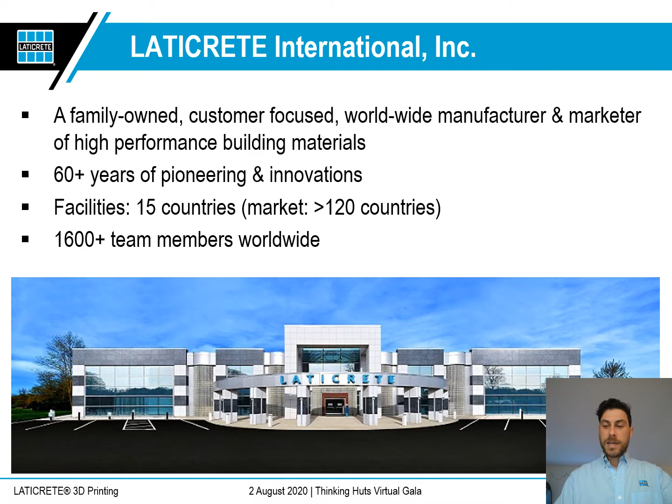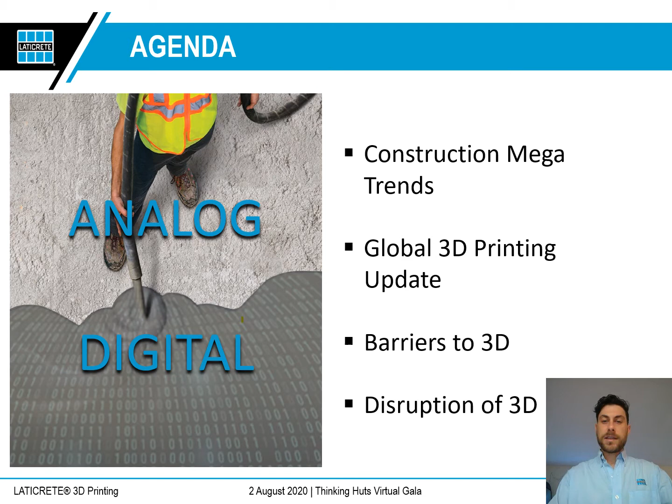So the agenda today: walk through some of these megatrends, what's happening also now with COVID-19, construction, global 3D printing, then some of the barriers that are slowing the adoption down, and the disruption potential that's out there.

COVID has changed a lot of people's working behaviors and perspective on things. One silver lining is that tech adoption is at an all-time high. Case in point, we're having this on Zoom. Most likely six months ago, this would have been an in-person meeting with me presenting in front of a crowd. So this is already quite a difference, but for a lot of people it's working well.

So we're seeing stuff like video analysis being brought right onto the job site. Do we have the right PPE? Do we have face masks and helmets? Are people following the safe social distancing protocols? There are sensors that alert people if they're not.

We're also seeing an increase in modular construction, bringing more off-site and bringing more finished product to the job site, seeing the efficiencies there. It's also a more controlled environment, with potentially fewer people on the job site. This changes the perspective of a building from a one-off project into more of a product, a manufactured product, rather than just a single construction project.

Also, there's even more advanced stuff. We're seeing autonomous vehicles—this is Built Robotics in the bottom left. They have autonomous excavation and other construction heavy equipment that's now being automated, so it's fully autonomous.

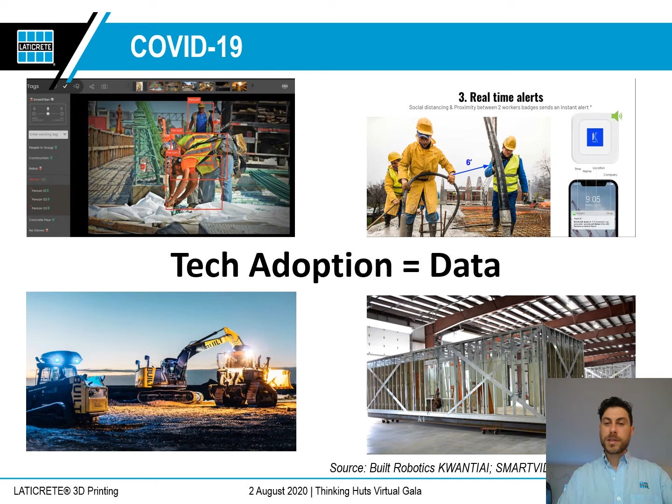With this perspective changing, we're asking ourselves: this finished product, what does it look like and how do people interact with it? So the idea of a healthier building, not just meeting building code or efficiency goals, but also how does this improve the productivity and life of the people using that building? Especially here we're talking about schools—there have been countless studies showing that better lighting, better air quality, and better ergonomics really influence the learning and adoption of what is being taught.

So this is perfectly applicable—we're seeing it through the lens of COVID-19 and how to make a building healthy, but it definitely applies to schools as well.

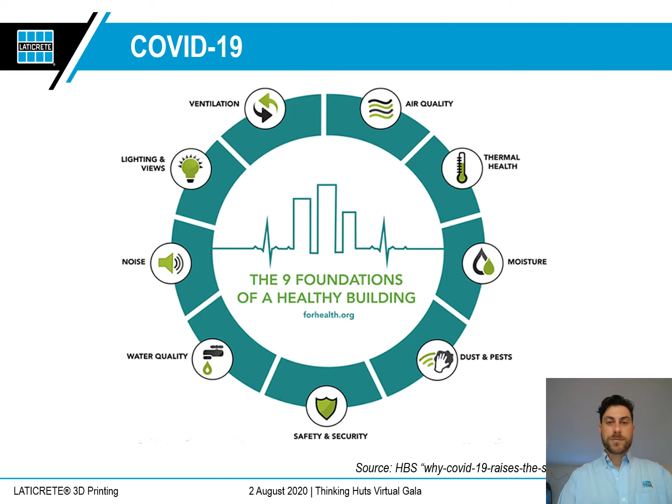Another thing worth noting: the world is definitely changing. We're seeing many more natural disasters, from wildfires to hurricanes, and population is continuously increasing. We'll definitely need more schools in the future, but with these natural disasters and instances happening, people are really questioning the efficacy of the materials we choose.

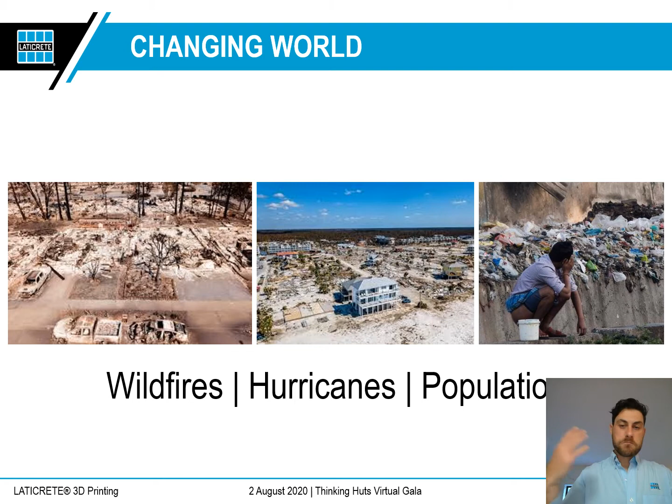So you look at the picture in the middle—the concrete house that was built independently, not the tract homes that got completely destroyed while meeting the minimum building code. The one in the middle, personally built, withstood the hurricane with no problem. People are starting to change their mentality as these events only increase in frequency.

Construction as a whole is seen as one of the least productive industries—it's basically flatlined in productivity over the last 20, 30 years, but it's a massive industry: 13% of GDP globally is represented by construction. With that low productivity, it's a huge arbitrage for venture capitalists, kind of the last frontier for them as far as an area to invest in.

So we're seeing just last year, 6 billion globally, thousands of startups popping up—again, that increase of tech adoption as well. This idea of the digital twin has only increased, with now 55% of companies saying they'll be utilizing it in the next 2 years. But take this as it is, because construction is a very complicated product, and the supply chain is not so simple.

It's not, and each project is still a one-off thing. With at least 80 trades, or on the average job site 80 trades doing different work, that's quite a feat to optimize the whole process and get everybody working together. So there's definitely still challenges.

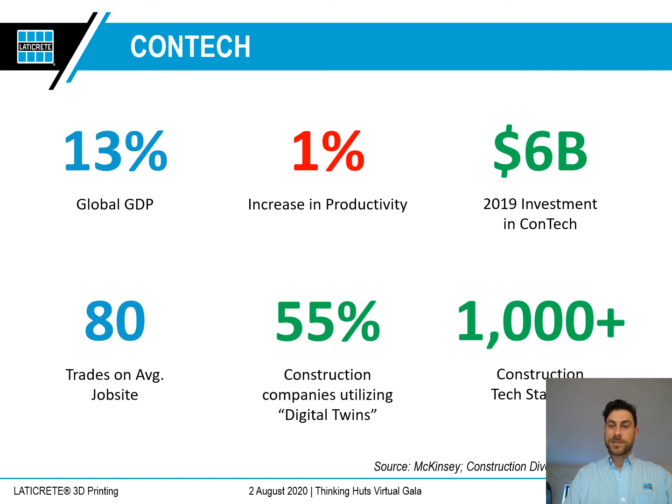So when we talk about this change in construction with technology, for me, and relevant to 3D construction printing, it's really this single term: constructability. This term is basically saying, well, how are we going to build the structure? It might sound rudimentary, but in the design phase there's often a break — someone's designing it, someone's saying, can this be structurally sound? Can we build it?

And then it's passed over to somebody else to actually figure out how to build it. With 3D printing, everything being a digitally native technology, you know exactly how the thing is going to be built. Whatever the G code is that's telling the printer where to place the material, that's what you're getting — so the as-built is equal to the design. We're able to ask this question in a very iterative and early stage in design of how we're going to build it, so the data is always being collected. As 3D printing develops, all of this coming together is producing a more efficient way to build.

Construction 3D printing is not going to take over everything. There's a time and a place, and again it's asking the right questions of when it's more viable. 3D printing is not going to replace tilt-up walls in the near future. Simple box type construction is definitely not an avenue for 3D printing, at least in the near future. In the near future we're looking much more at highly complex builds, added value that you can only get via 3D printing.

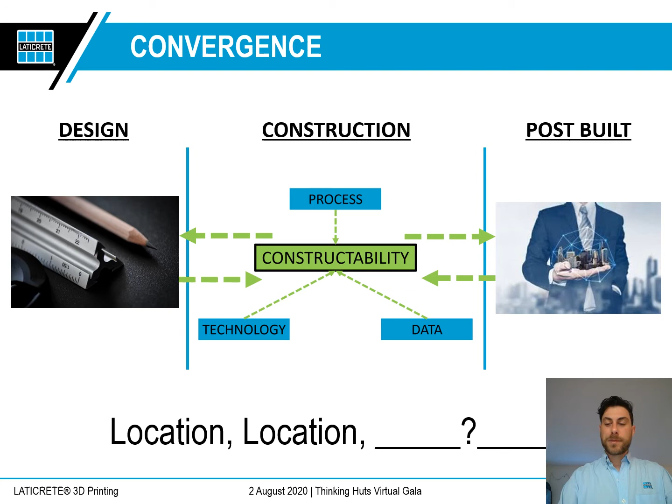In the past, location really dictated a lot of the development of the property, and now we're starting to see where these things can be somewhat separate. You can have the land itself, and that appreciates or depreciates independently from the actual product, the house that's being built on it. So a lot of new concepts are being brought into how we look at and evaluate construction.

So what is 3D printing? Essentially, you take that design, you slice it, you break it into layers — so the other term for it is additive manufacturing. You take the computer model and you create what's called a G code. The G code is essentially an XYZ point cloud in space; it says place this material here. Then you have a printer, the actual hardware behind it.

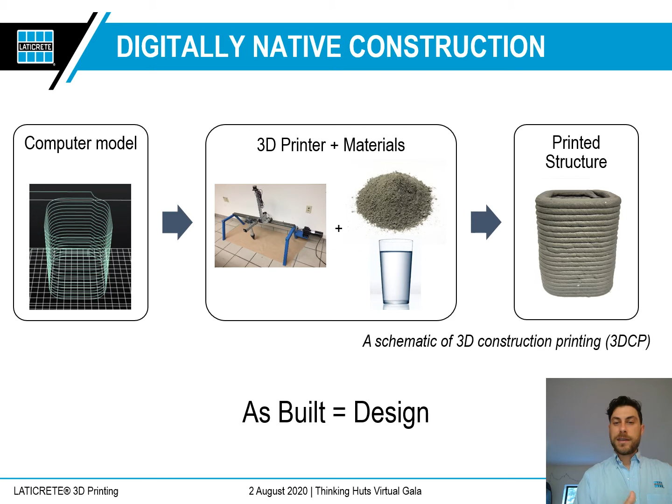In our case, this is a one-component system, so you just mix it with water — that's our LATICRETE 3D printing mortar. With a printer — this is our very early stage lab version — that becomes the printed structure. So again, the big 'so what' of this, what's different, is the as-built is equal to the design. So you can use the digital twin for any of those post-build scenarios that we mentioned, and again it's matching up one-to-one. So why 3D?

Construction productivity, we mentioned, is very low. So this is increasing productivity. It's less people on the job site. The schedule is also matching up to what was designed. So this idea of constructability is taking on many dimensions. It's cost, it's time, it's also material. So now we know exactly what is the yield.

So if we have to bleed out a little bit of material in the hoses to get the printer up and going, then we know we have, let's say, a 95% yield. As opposed to in the past, whatever was delivered to the job site, you had a much larger margin of plus or minus extra material, just in case things weren't exactly as planned.

The speed is something like Moore's law here, where we're seeing print speeds that were 150, 200 millimeters a second just a year or two ago, are now 300, 600. So we're definitely seeing the speed of construction 3D printing really increasing quickly, again something like Moore's law.

The big thing with 3D printing across really all industries is the complexity. It doesn't cost anything extra to do a unique project. We see this in the medical field with prostheses, with dental implants and stuff like that. Automotive is using it for prototyping.

So in construction, it's, again, the luxury home market, which is in and of itself a massive market. And if this starts at that high end, where we're seeing like what we've done in Dubai, building one-off custom homes, this is a start to get the technology up and running.

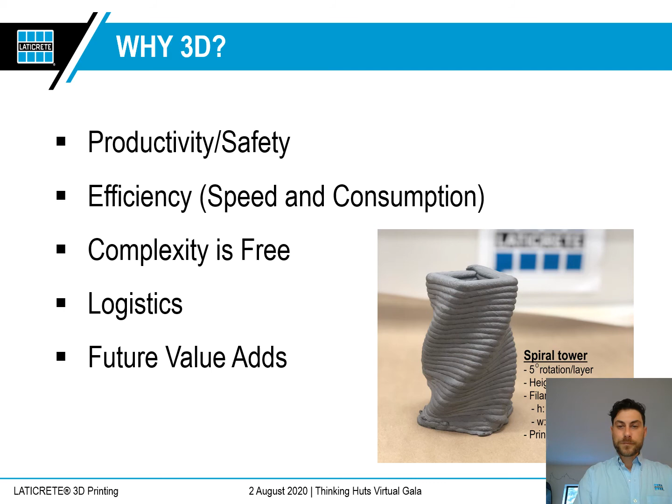The different types of 3D printer - there's really two that have coalesced as the main types of 3D printing. It's a 6-axis robot like ABB or KUKA that's used in a lot of manufacturing environments, and then the gantry system. The gantry system is an XYZ plotter using gravity fed, sometimes with an additional mechanism to control the dispersion of that extrusion.

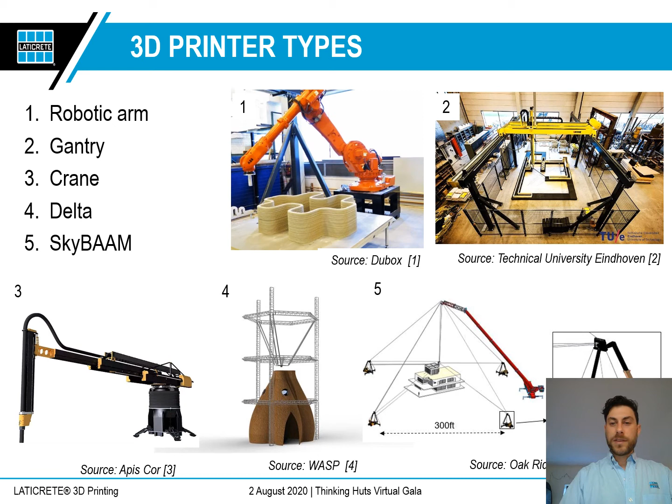There are also alternative materials to concrete or cementitious based. There's soil, using local soil - this is WASP in Italy. There's hempcrete in Australia, plastic with Branch Technologies in the US that's creating a positive mold. And there's still sand deposition and other types of 3D printing, printing in gel. So really a lot of different technologies.

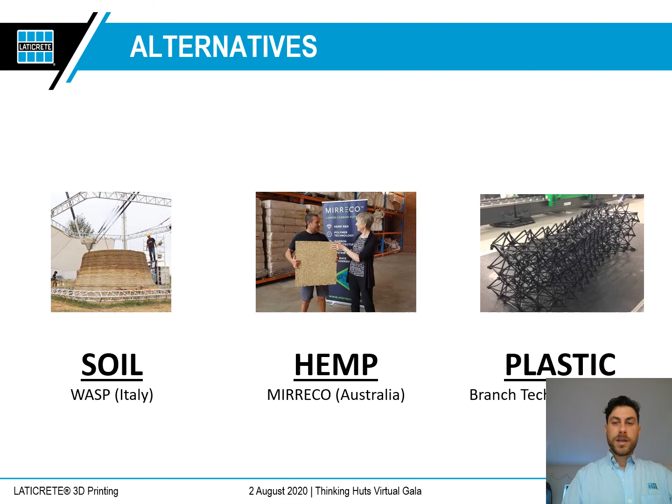The two main for construction printing that have coalesced is the gantry with the XYZ plotter, or the 6-axis robot, both being extruded models, and that additive manufacturing being layer by layer.

As far as global markets, definitely Dubai and the Emirates is a leader, having the Sheikh make a vision behind that 3D printing will be 25% of the construction in Dubai in the next decade. So we're well underway with this. There's a lot of companies competing for it, both industries, from the hardware side, the material side - academia is getting involved. So really that has been identified as a key market.

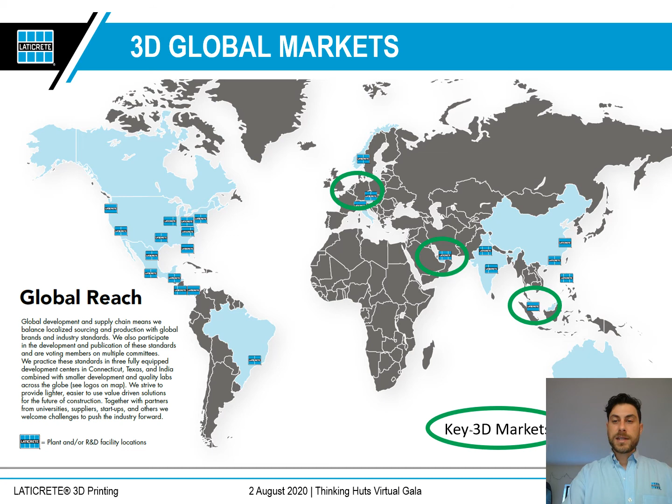Additionally, in the Netherlands, we're seeing a lot of development, again these private-public partnerships between universities, large construction companies, material companies, and others. And then Singapore as well, again with government support giving money towards 3D printing.

Our material that we've developed - right now we're up over 120 formulations that we've tested and worked with. Essentially a 3D printable mortar, you need it to be thixotropic, or at least under stress it has to flow. So you have to be able to mix it, it has to be able to flow through the pump and the mixer, through the hose, but then it has to be buildable. So at the point of extrusion, it has to hold its shape, no slump, and it has to adhere to the layer below it.

So a lot of different characteristics of the same material in a really relatively short time frame. From mixing to actually being extruded could be anywhere from seconds to just a couple minutes, and the subsequent layers being placed, again, seconds to a couple minutes.

So it's really a whole new dynamic in 3D printing. Behind the scenes, there's also a lot to get this technology moving. We're looking at certifications, how it compares to conventional, and localization of material—we're dealing with a heavy material that we can't ship very well. So using local raw materials where we can, and then R&D support from LATICRETE to get these materials working on the job site.

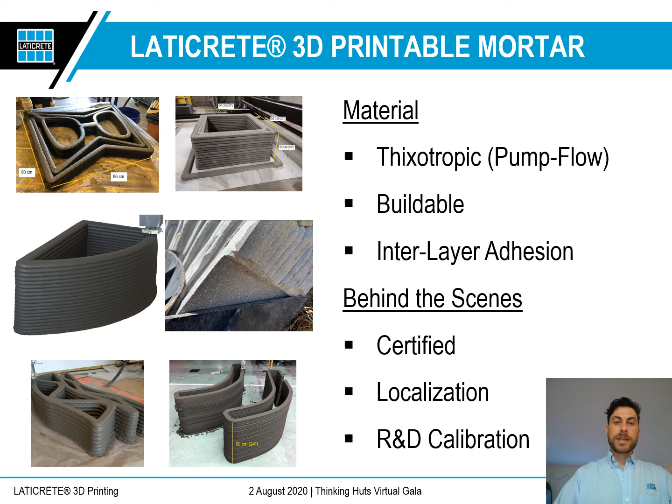So a couple of highlights. This is a pavilion that we did with Ball State University. Chris Battaglia was the designer, and this is in Columbus, Indiana, for Exhibit Columbus. It's 110 unique panels, all weight optimized. So you see the voids on the top—there's less material because there's less force being put on those.

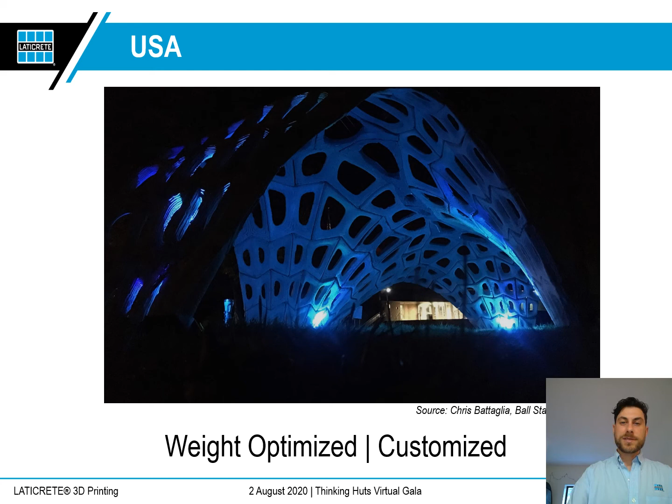This is the first house that will go commercially sold. This is in Dubai. It was certified with the Dubai municipality, weather tested to the desert conditions, and used localized material.

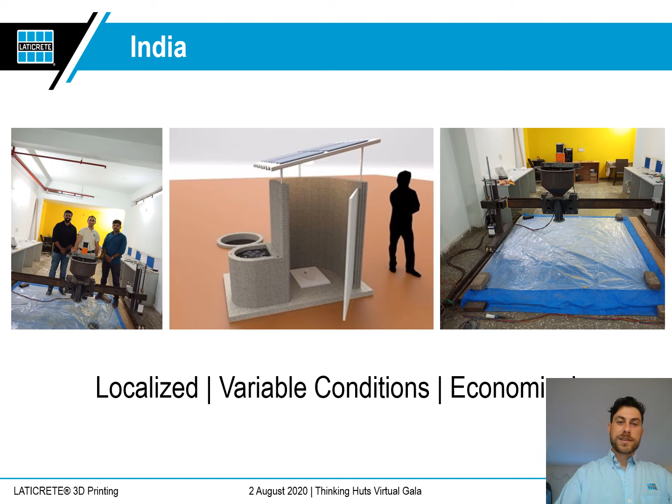In India, we're 3D printing toilets with a project together with the government that's looking to make public toilets available to everybody across the country. And this is component systems—imagine Lego blocks that are stacked on top of each other. They're 3D printed off-site and then assembled on-site.

So schools—the big opportunity I see with schools in general, thank you Maggie for bringing it to our attention, is really the building itself can be the learning opportunity. So you look at something like a zero energy classroom, we're seeing energy consumption monitored in real time, and students are capitalizing on it as an opportunity to learn about the built world. It's motivation to get people involved in construction, engineering, and material science. Also, there's definitely a need as population grows—we're going to need more schools. So it's a very great fit for construction 3D printing.

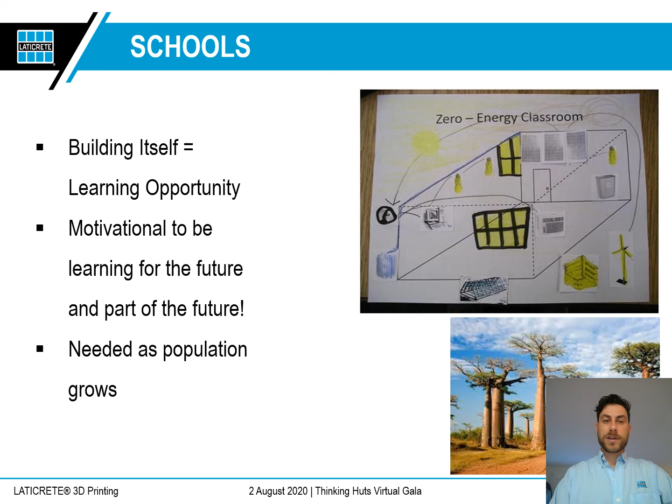Definitely, so the challenges: lab scale versus field. We're still very much in a prototyping stage, but prototyping a building that's a living space is very challenging. You have to get everything aligned just right for the prototypes to be built. It's not an easy endeavor, and that's why we've seen probably less than 30 true structures built via 3D printing to date. Building code is still something that lags, it moves slow.

Standards as well—we're sitting on the boards of some of these to influence and stay abreast of what's happening with construction standards, but it is a long process. It's also challenging because with so few projects to reference and the cost involved, it's kind of a chicken or the egg of what comes first. So places that are more open towards pushing the envelope, using more computer-aided design that gives real insight to what's happening, that's where we're looking that 3D printing is going to take its first steps forward.

Also, the end goal here is integration that's plug and play—there's at least 80 trades on a construction project, so replacing one of them. What we've done so far with 3D printing is essentially 3D framing, printing non-structural parts of the building, potentially structural formworks. So it's one component, one of those trades being replaced. It's not holistic printing of a finished structure yet. We are looking to incorporate other aspects in, but it's still mixing an automated, digitally fabricated process with conventional human labor.